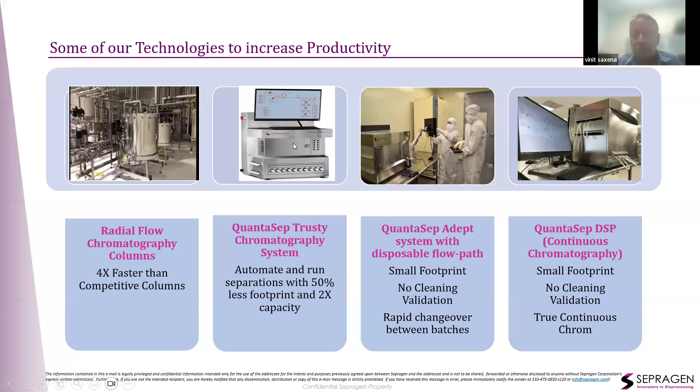Just some slides here about large scale column installations, small bench systems, single use systems, continuous systems, resins, pre-packed columns, inline dilution systems, continuous systems like that. Okay, so that's the one minute commercial, we are done.

And so now, what is the problem with the current process?

Everyone is focused on reducing cost, reducing the complexities, speeding up the process, reducing cycle times, reducing FTEs, operating costs, cost of goods, cap cost, etc.

Historically, biological manufacturing processes have been batch or fed batch. This has resulted in very complex processes which are unit operations dependent. You have a whole series of unit operations and hold steps between them, so everything's labor intensive. You have to take samples at each point in the process, creating hold steps, and it adds to the cycle times, lowers efficiency, etc.

And the facilities we have are modeled after this batch process. So if the titers go up, suddenly the purification suite isn't big enough to handle those large columns or skids, or our buffer suites don't have the capacity to make buffers, or we don't have enough storage space for those things. Lots of issues like that, where we're blocked in terms of ability to really bring efficiency to the production floor.

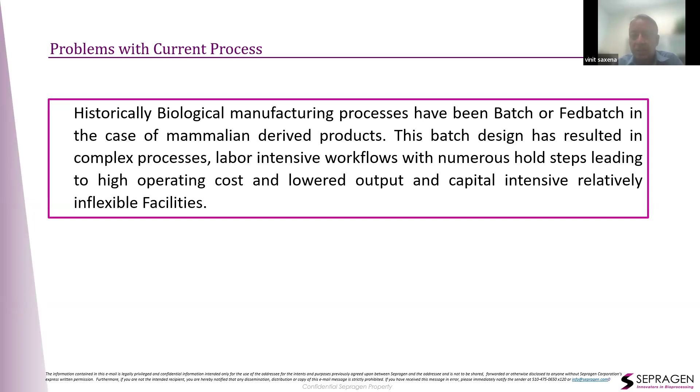One of the most compelling reasons, since we are a regulated industry, when people talk about continuous chromatography, one thing that may come to mind is, what does the FDA think about it? So we wanted to get that out of the way. For people who aren't in the know, the FDA issued guidelines as far back as 2013, where they're pushing for continuous processing and bringing about more efficiency in our ability to produce products at lower costs.

They want, of course, proper processes in place so we can monitor the process effectively, bring more PAT, process analytical technologies, to the fore, so we can ensure the processes are robust. But ultimately, the driver is to lower manufacturing costs and bring about efficiency. So this is one place where the regulators are actually aligned with this push towards continuous processing.

And people in manufacturing spaces may think that's something new and they'll have resistance. Not at all true.

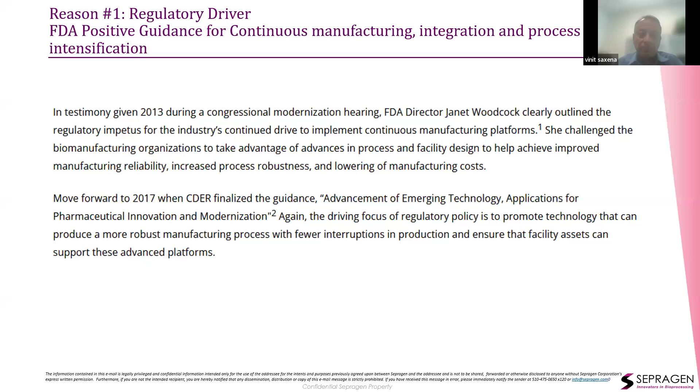The second reason for considering this is, especially if you're considering a greenfield site, there's lots of data out there to show that the CapEx of a continuous process is far less, especially if it's dedicated to a particular process, than a greenfield batch operation.

Sizes of the equipment, number of tanks required—well, you figure you're doing one part of the process at a time. So you're batching things, making the batch large, processing, then going to the next step. Even though you can have some marginal overlap, it's still a very slow process.

What we found is that if the process is running continuously, for instance, column sizes can be reduced by as much as 10x because you're doing continuously more cycles, right? You're not doing one big batch and running it on a big column. So column sizes come down, daily buffer consumption can come down.

The hold tanks and surge tanks between unit operations go away, and all that QC from those tanks kind of goes away. The number of totes required goes down significantly, so you have much more usable footprint and a better workflow.

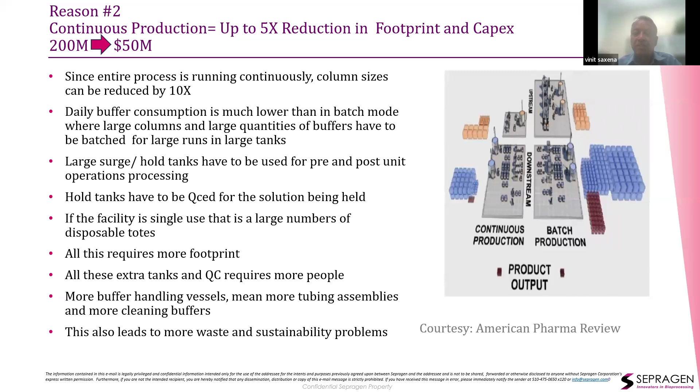And of course, it adds up in terms of less FTEs, less waste, less sustainability issues, less energy costs. So overall, it obviously positively affects not only the CapEx by making a smaller facility—facilities are expensive—but also OpEx as well.

And here's a traditional process, and these have long cycle times. As I said, you go a step from one process step to another to another. In terms of process intensification, what are we looking at?

We are doing continuous perfusion cell culture, great. And then we might be doing ATF or something, or continuous centrifugation. Then we might be moving to continuous chromatography—some of us are.

And then there's, of course, what happens if this is a standard antibody—what happens to the VI step? What happens to the flow-through steps? What happens to UFDF? What happens to formulation, fill, and finish? So we have hold points, and these things can be made continuous by concatenating and integrating these various steps, but everyone forgets about buffer management.

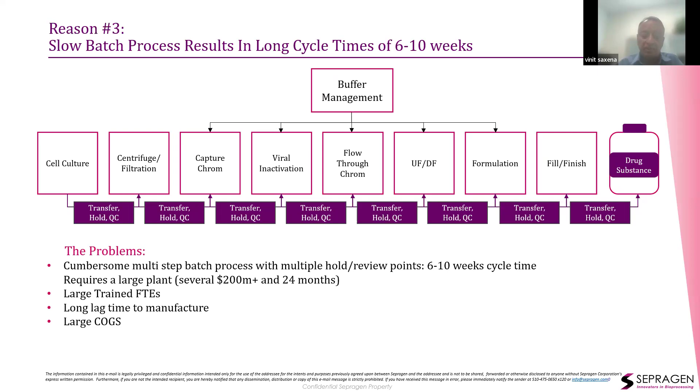There's no sense in running a continuous process if you're going to make buffers in batches and run a bucket brigade, where you're having to store lots and lots of totes. So you have long cycle times, and obviously, as a result of these complex operations, your COGS are very high—your cost of goods are very high.

The potential impact from going from a batch mode to a fed batch mode to a continuous process could be a 5x reduction in CapEx, and as much as an 8 to 10x reduction in OpEx. So really major benefits to be had, and we really need to look carefully and hard at how we can start to incorporate these in our manufacturing facilities.

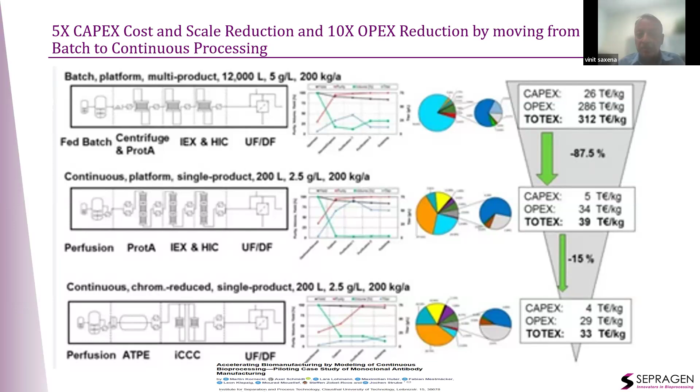And here's a simple example.

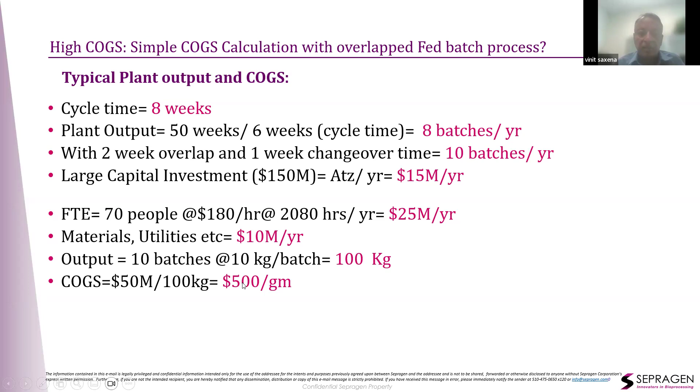Currently, even if you overlap batches and you have a $150 million investment in CapEx, and you're running 8 batches a year with an 8-week cycle time, or you overlap these things and are more efficient to run 10, maybe 12 batches, at 70% facility utilization, that's $500 a gram. Keep that in the back of your mind, we'll come back to each of these points.

So what happens now if the titer goes up? If the titer goes up, great, upstream there's no problem. But downstream, everything is stressed, because these suites are all of a sudden not enough. You have bigger columns, bigger skids. The buffer prep rooms are not big enough because you need more buffers if your column sizes are going up. And for storage, certainly not enough.

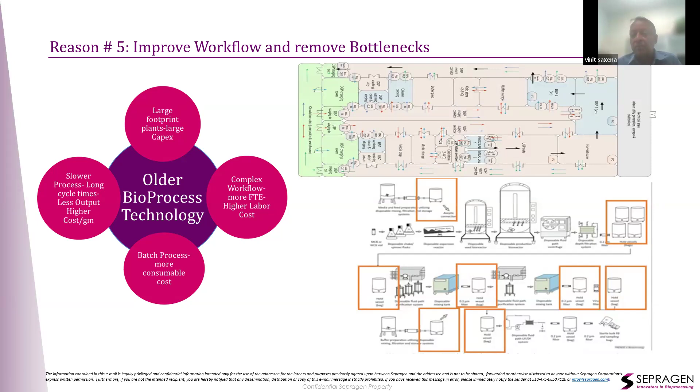How many of us have seen totes lined up in these hallways, and people having to stop their runs to pull totes in and remove the spent totes out? Very, very common. All these kinds of workflow issues and bottlenecks really slow down the process, cause us to have more FTEs, and also cause operational and quality problems.

And of course, very complex, labor intensive, and costly. So the COGS don't relate just to amortized capital costs, where you can have a smaller facility if you go continuous and therefore less amortized capital cost, but also the consumables and the labor. You add all that, and it's a significant effect on the cost of goods, and of course your workflow complexity.

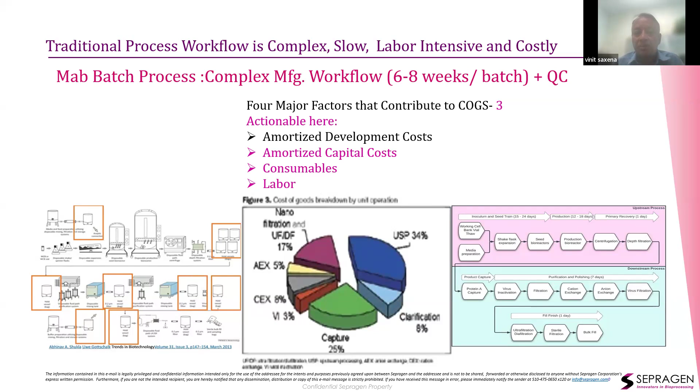So we'll just take one example out of the workflow when we talk about complexity: making buffers. BioPhorum did a study and concluded that for making 2,000 liters of buffer, it takes 7 hours with 2 FTEs. You look at how many chromatography steps there are, what the scale is, and how much buffer you actually need.

Even if you have a continuous process, in this particular plant we have a continuous process where, in light blue, you have your process gallery—it's like a big ballroom type of operation where you're going closed loop from one step to the other. This whole thing in red is your buffer prep. Especially if you're running an intensified process, your titers are high, the amount of buffers that you need are huge, and somebody has to make them.

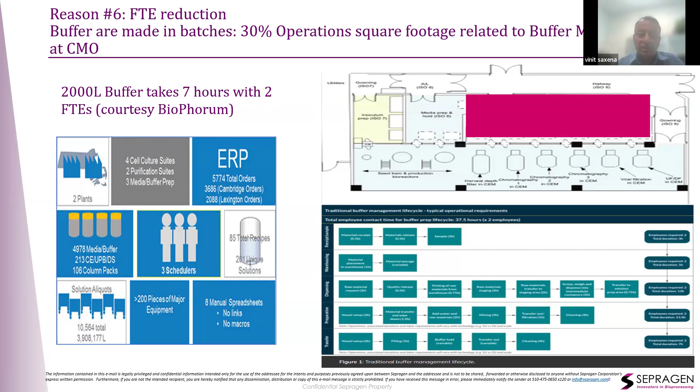So you find that your FTEs in that area go disproportionately as your titers go up—your FTEs and space requirements go up.

Some of you might be members of NIIMBL, the National Institute for Innovation in Manufacturing Biopharmaceuticals, others may not. For their members, they're given a guideline of a certain continuous plant design, and we're not privy to show that, but this is a concept very similar to that, where you can have a processing suite essentially down here for a typical antibody going from upstream to Chrom 1, Chrom 2, Chrom 3, and intermediate steps in between for a continuous process.

And then you could have your individual components of the buffers—say, monobasic phosphate, dibasic phosphate, 1 molar as an example, 3 molar salt, or it could be acetic acid, 1 molar, sodium acetate, 1 molar: the components needed to make the buffer, and the relevant salt or other additives you might need, so those basic chemicals.

And then they have a stock buffer blending solution, which can mix 1x or 5x buffers. In order to keep the space down, they propose making 5x buffers and then having chrom skids here with the ability to dilute the 5x buffers. So that's the space requirement.

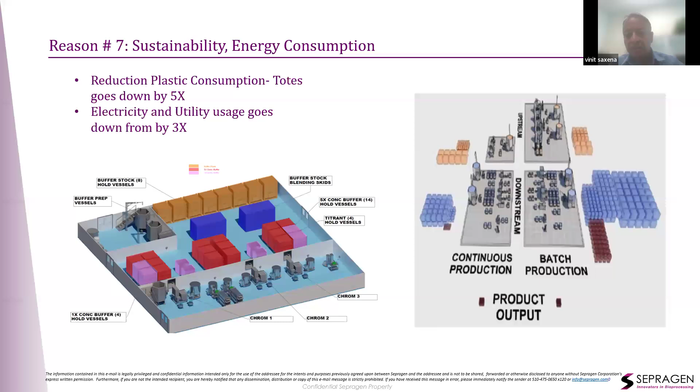So those are all the 7 reasons why we would want to consider continuous processing, whether you do it incrementally in each of your steps and move down from the beginning to the end, or you take particular sections of it, or if you're doing a greenfield, doing the whole thing and making a connected process.

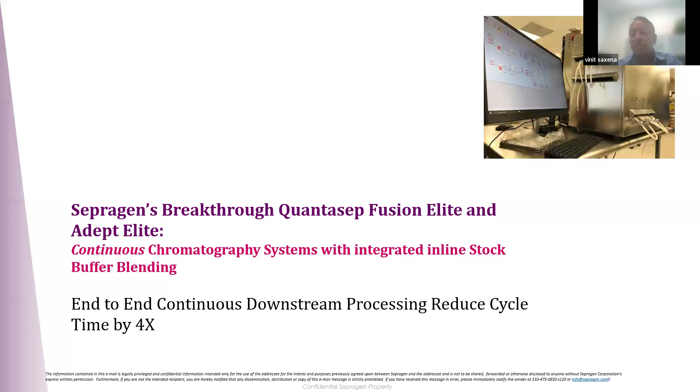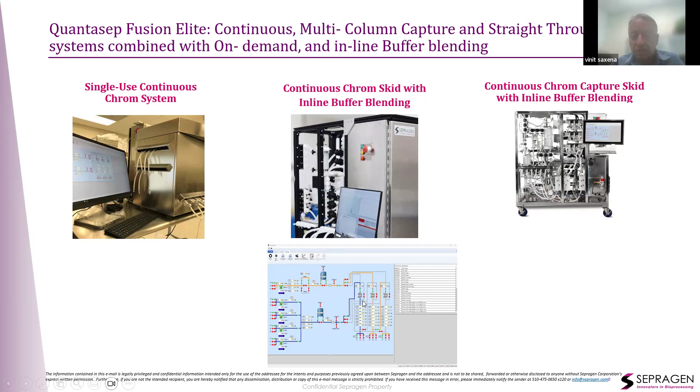And then these columns go around in a round robin, musical chairs or musical columns. So you can continuously run your harvest while you're also doing elution of one column, column 1, column 2, column 3, like that. And we can do it with inline buffer dilution, or without inline buffer conditioning, whatever people want.

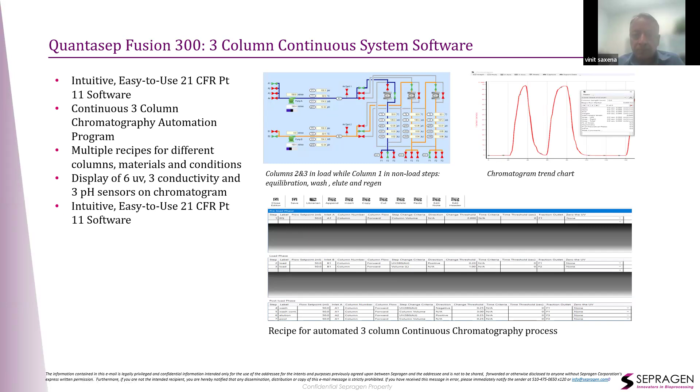And here's another example of the bench scale system where that is being done. In fact, we have automated an entire antibody downstream process. So coming from clarified harvest, we have what we call a capture skid, where we have, in this case, a 2-column system running protein A columns, running the harvest continuously, washing and eluting from the stock chemicals, while buffers are being made for these in line on demand.

And then going through the VI step where there's a low pH hold, and then a second skid, which is a flow-through skid, essentially a straight-through process, where the pH is adjusted in line by the skid itself, goes through an AEX column. The salinity is adjusted in line, just continuously - there's no hold tank or anything. And then it goes through the HIC column, through a nanofilter, and out. So between these two skids, which we call a fusion elite and a fusion continuous capture and continuous flow through, the entire process is done.

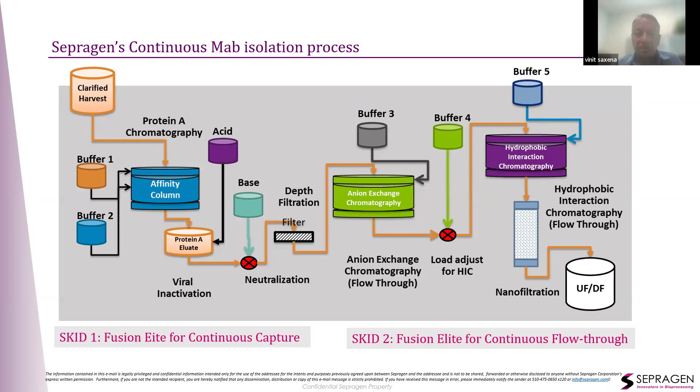Okay, so here are pictures of that.

And the P&IDs of such a system, where you have the load here going to either column 1 or column 2, and then this is the buffer making part of the skid, where you have the water pump, the acid pump, the base pump, and the salt pump, all running at different ratios. You don't have to set the ratios - you just set the molarity, the pH, and conductivity in the program, and the buffers are made automatically.

And they automatically switch from - as you load, your first column gets saturated, moves to the second column, while the first column goes through the wash, elution, regen, and equilibration cycle, and then they keep flipping.

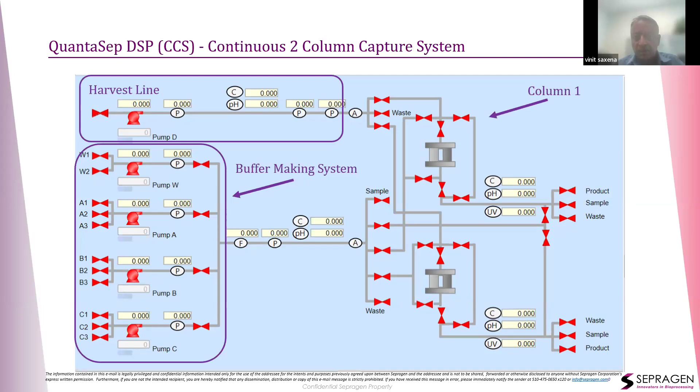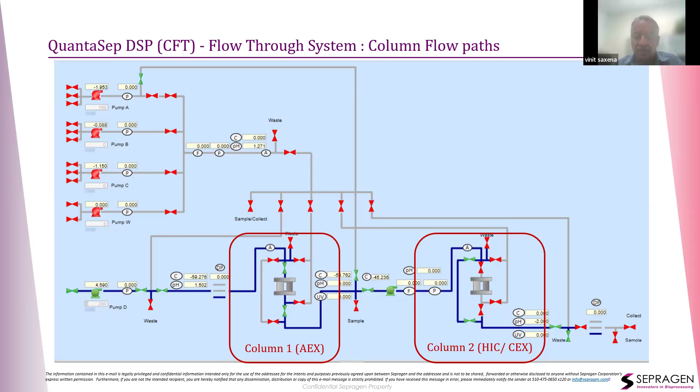So that's the buffer maker, right? That's the harvest, see the column 1, column 2. And then similarly, we have the flow-through system where you have the AEX column there, the HIC column. Some cases we have a CEX column.

And so we've done multiple lines of this. This is a company for which we've done all three - the capture, the AEX, the CEX - and this is on a high titer 2,000 liter perfusion line on the left here. So there are 2 parallel lines that they have for this facility, running capture for an antibody processing line - capture, AEX, and CEX.

By the way, we can do in the CEX, they're doing gradients. So it's not like you don't have the ability to do gradients and do buffer mixing, all that, inline buffer blending, all at the same time.

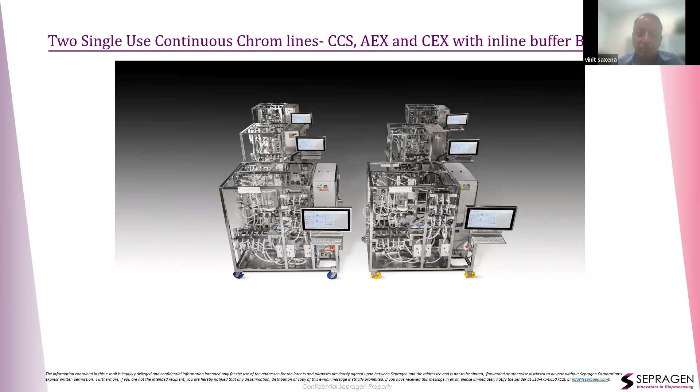So essentially, what this enables one to do is do 2 functions in one, right? So whereas you might have heard of continuous processing systems, a lot of the reason why these have not been adopted is because they have to make buffers in batches. And while there are separate machines to do that, they still have to make those buffers, put them in totes, transport them somewhere, move out the empty buffers, move in the fresh buffers, or if there's level sensors in the tanks, then those can automatically turn on the buffer making system. And you have to wait for it to equalize, and then stop the process until those are filled, etc. So there's a lot of complications around that.

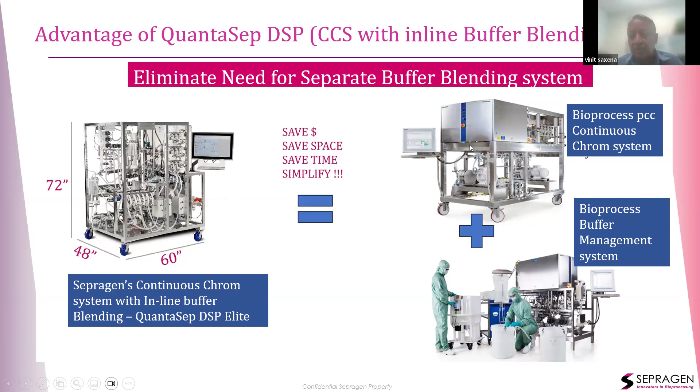We've got all that in one neat package here, where in this system you can do continuous chrom with inline stock buffer blending, and that is the equivalent of these two machines. So now you have, really, it frees you up. You're looking at removing the blocks, so it frees you up to adopt continuous processing and manufacturing without a lot of hassle.

And so here is the P&ID for actually the operating software interface for that machine, where you have the harvest pump here on the top, goes through a pre-column, a switching pre-column filter, bubble trap, goes through column one, through all the bank of sensors, UV conductivity, pH, goes and is running an overload, goes on to the second column, while the first column, which is saturated, is then goes into the mode where it's doing washing and equilibration.

And regeneration, things like that, from the same set of concentrates. So it's the same, let's say, an acetate concentrate that you have hooked up, or connected, which is 1 molar sodium acetate, 1 molar acetic acid. But you just tell the machine, okay, I want 0.05 molar acetate, and I want 20 millisiemens, whatever it is, 0.1 molar salt. And the system's pumps will run at the right ratio to give you that molarity, that pH, and that conductivity.

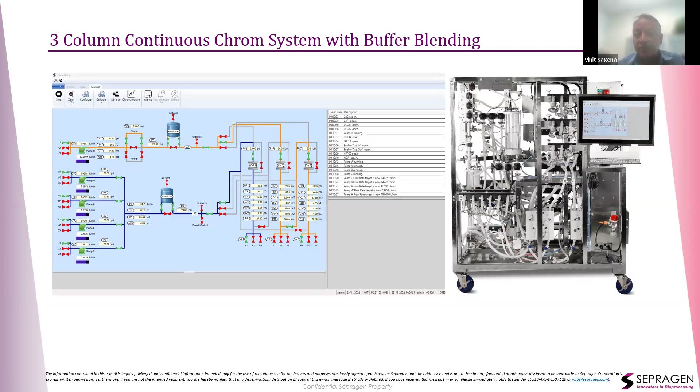And when the buffer is outside that range, you have a process tolerance alarm where that gets ejected, and then it comes back online when it's within the range and goes into the column. Very convenient, very transparent to the user, and you can continuously run your process. You have the usual event logs. You can make recipes. You have a chromatogram where you can look at all the trends.

Once you finish your manual run, you just stop it like this, and it will save all the event logs that you can see here, all the alarm logs, and all the chromatogram will be saved.

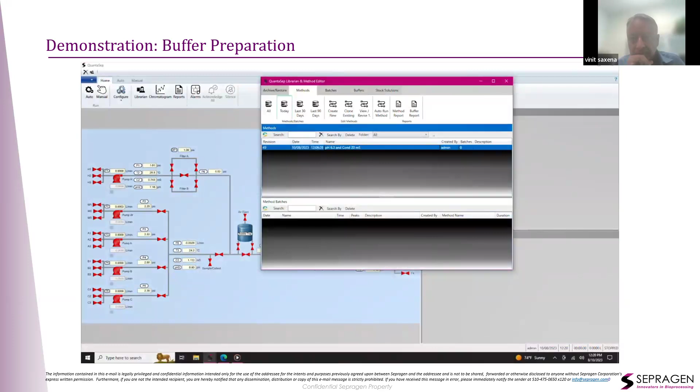I wouldn't go through it today, but I will show you one of the methods that I will be running today, which has two unique features, a conductivity set point and pH set point. This is actually what is unique about this system. Whatever you have in the solution concentration, whatever you have in your pH, whatever you have in your conductivity, the system has the capability of doing this kind of blending to reach your conductivity set point and pH set point without any interaction from you. You just give the order to the system and the system will do it for you.

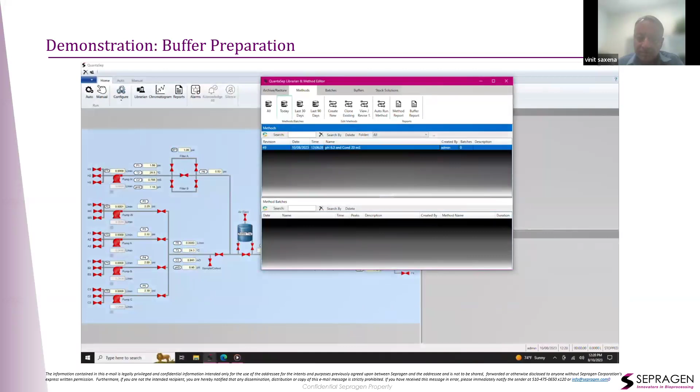So for this method I created, we will have a conductivity of 20 millisiemens out of a concentrated solution of 3 molar sodium chloride, which is approximately 200 millisiemens, and we will have a buffer blending between sodium phosphate mono-basic and dibasic at a concentration of 0.5 molar each, and we would like to have a blending giving us a 6.3 pH.

So the methods that I created, we can review it together very quick. As you can see here, it's like an Excel-based thing. So here you can type a label for your step.

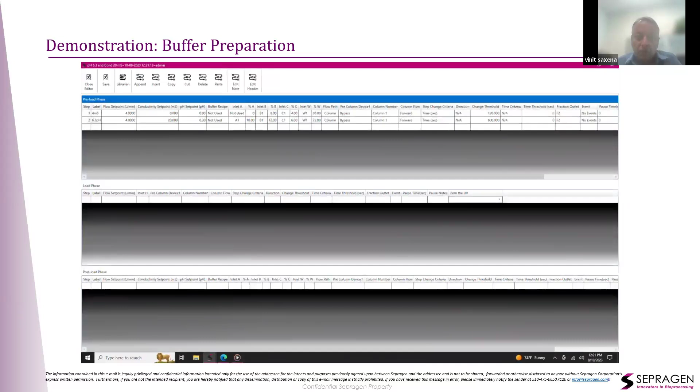You can choose a flow set point, whatever the liters you would like to have, a conductivity set point, pH set point, and which inlet you're gonna use. We have a dedicated pump for each of those. We have a dedicated pump for the conductivity, called pump A. The system already knows anything coming from pump A will be for a salt, pump B is dedicated for an acid, and pump C is dedicated for a base. Whatever the system would like to blend for you to reach the set point, it's a random percentage.

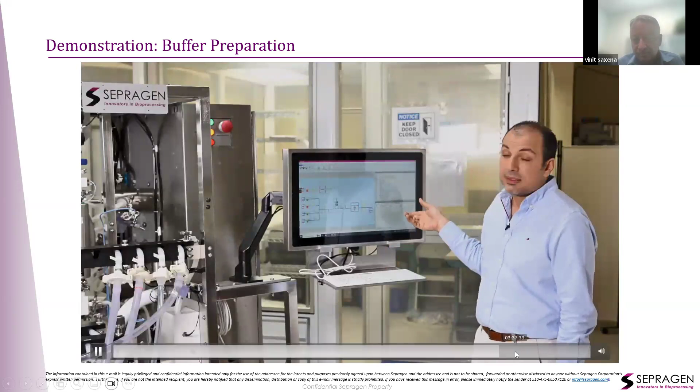Obviously, in deference to all of you, we want to keep to our time here that I promised you, but you get a sense. That was one of our scientists, Ibrahim, who's one of our application scientists, talking about the machine and its ability to be very easily programmed.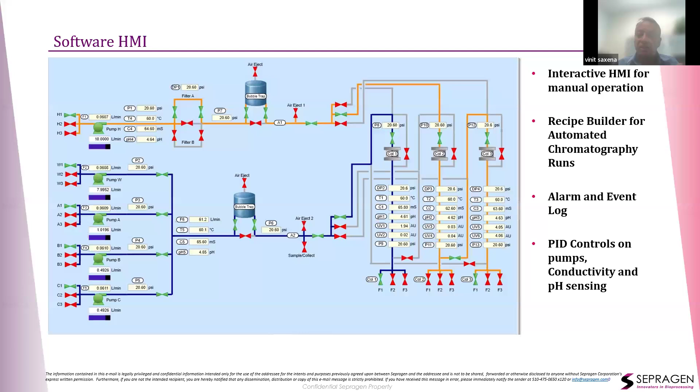So you can run continuously and have the buffers be made continuously. You don't have to set ratios of different pumps or flow rates or anything like that. It all does all of that behind the scenes, right?

And then the result from something like this, for instance, is a 200 millimolar salt that we said was 10 millisiemens, achieved in just like 20 seconds. And here, 45 millisiemens is the next wash step. Anything that's outside that operating envelope, obviously like this part of the peak goes to waste.

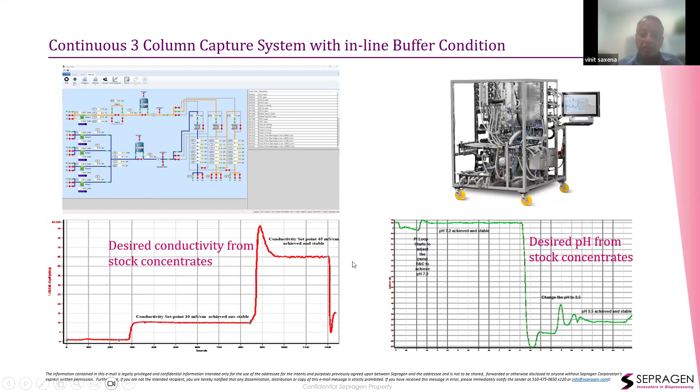While these equilibration and wash buffers are changing, the pH might be changing as well. So pH here, for instance, is going from 7.2 to 3.5. Again, those transitions happen in approximately a minute. So that's about the level, given the whole volume in the system, if you were switching from one buffer to another, that's what would essentially be going to waste, which is what happens in this particular case. And when you hit the stable point, then the buffer goes right to the column.

So in doing this, we looked at the footprint from earlier, and that was this particular process, what we were calling a Gen 1 process. The standard batch process is Gen 0, and this is a Gen 1 continuous process. With what I just showed you with those machines, you can eliminate even these buffer-making machines and all these hold tanks over here having 5x concentrates, because you can just put your stock chemicals over here, move them right to the front against these skids, and go ahead and do your continuous chromatography with those stock chemical solutions.

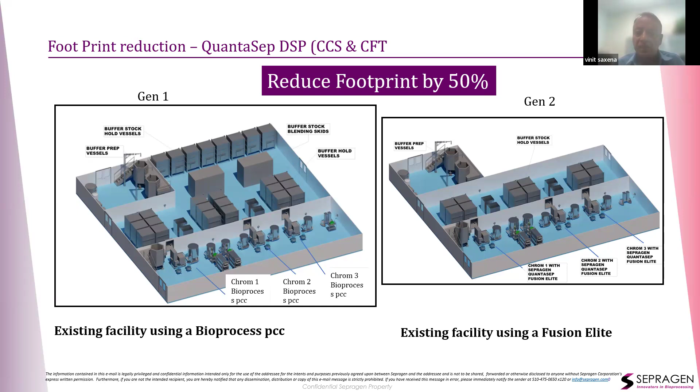And so it reduces the FTEs, reduces the footprint even further, and reduces the cost. Going from a Gen 1 continuous plant to what we are doing and calling Gen 2, in this particular model for this plant, we've reduced the capex from 13 to about 13.6 million to 7.5 million. So that's over a $6 million, almost a 50% reduction in capex.

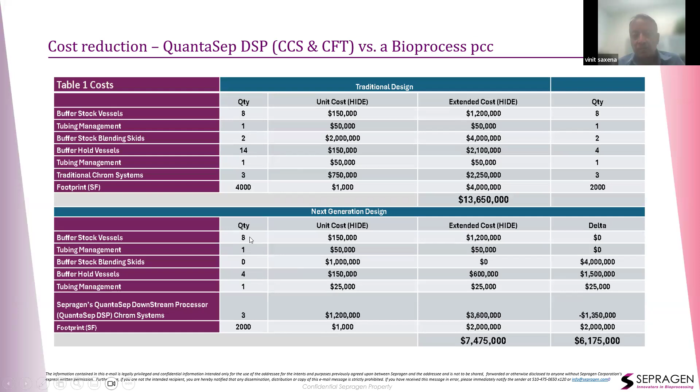Not to talk about the number of stock buffer solutions or hold tanks that you would need. For instance, here, this is for a continuous process, by the way. You have 14 hold vessels, right? We are down to 4. So look at the impact that we have on sustainability, right? Significant. We have almost 30% lower.

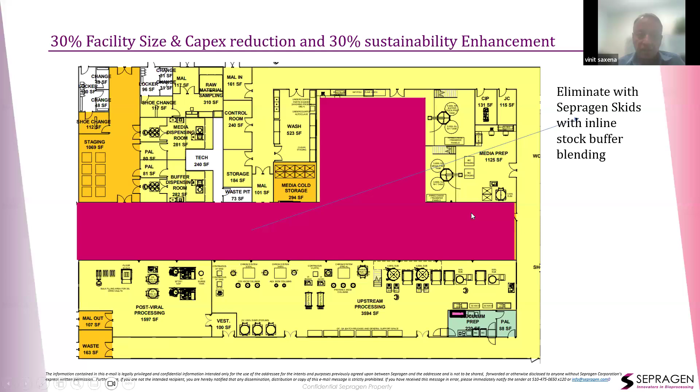And we don't need all that space again. So facility size is reduced, capex is reduced, and there's sustainability enhancement. And of course, we've simplified the process, right?

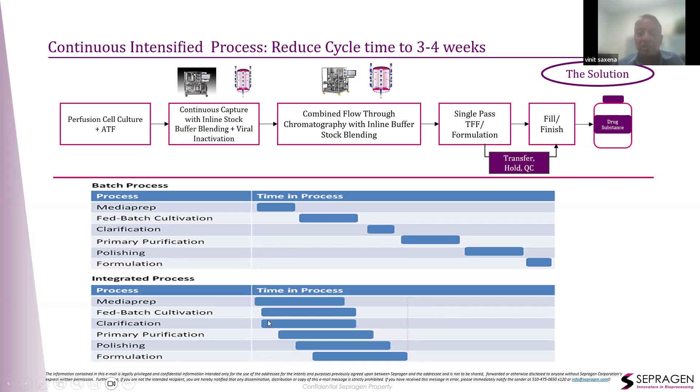As we've continued, if we can do in the same skid, we can do continuous capture and VI, and the next skid we can do flow through and inline buffer blending. The whole buffer blending part goes away, and this process becomes more simplified and more amenable to continuous processing. And then you can see that from a batch process to continuous integrated process, the whole cycle time is reduced to 3 to 4 weeks.

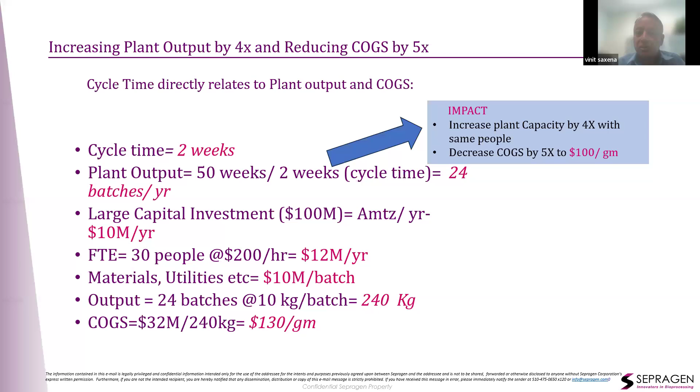And the impact of that is if your cycle time for the same plant is reduced, instead of making 8 or 10 batches, with a cycle time of 2 weeks, you can make 24 batches for the same output. Fixed expenses of people as well as facilities, your costs can come down dramatically. In our model, it comes down from $500 to $130 a gram. So you're looking at a 4x improvement in plant output because you're making more batches in that semi-continuous operation, more batches a year, and you're amortizing your costs over more batches, and the cost per gram also comes down.

So to summarize, there are 7 economic, operational, and sustainability reasons to go with continuous chromatography, preferably integrated with inline buffer blending like we've shown you. Those are: increased output, as we just showed, because you can do more batches per year since your cycle times have come down. CapEx reduction, because your facilities are smaller. Reduced facility footprint, reduced COGS, reduced cycle times. And if your process is more simplified, without so many hold steps and buffer-making requirements, you're reducing workflow bottlenecks. And of course, you're improving sustainability, with reduction of chemicals, smaller footprint, smaller equipment, and fewer disposables.

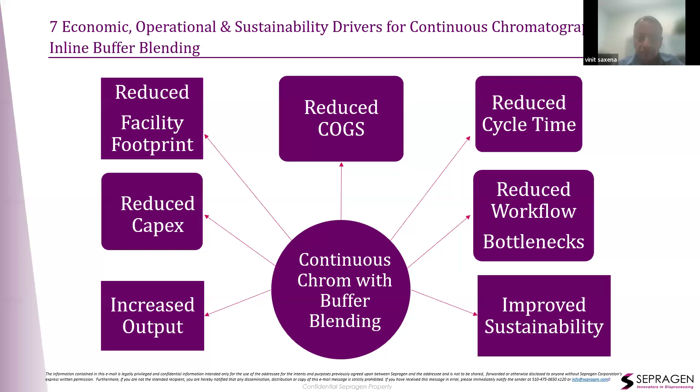But just about us - if this is a direction you are choosing to go in or considering, look us up. We do a lot of customization downstream. We recognize that one solution doesn't fit all, one size doesn't fit all. People's plants are different, their control strategies different, and whether it's a greenfield or retrofit, we have to conform to whatever your plant's requirements are. We have project management people here, world-class engineering, and so we can design something that's a better fit for you, as opposed to picking something standard and off the shelf which may or may not work for you.

And we go through the whole project plan from preliminary design, P&IDs, solid modeling, the whole DQ process, FDS, drawing reviews, implementation, FAT, SAT, and eventually IOQs. If you have a DCS system, being able to talk to upstream and downstream equipment is important, whether through Profinet or other means if you have a continuous system. You may need to talk with the DCS system through OPC UA. So we provide those facilities, and our software team can work with your team to ensure that. Similarly, if you're on a network that authenticates access with certain privileges, we support that as well.

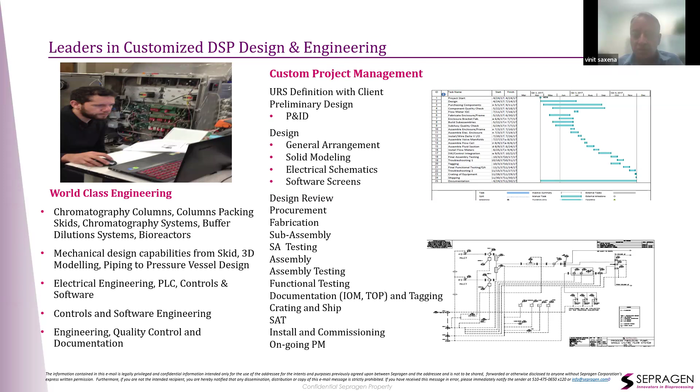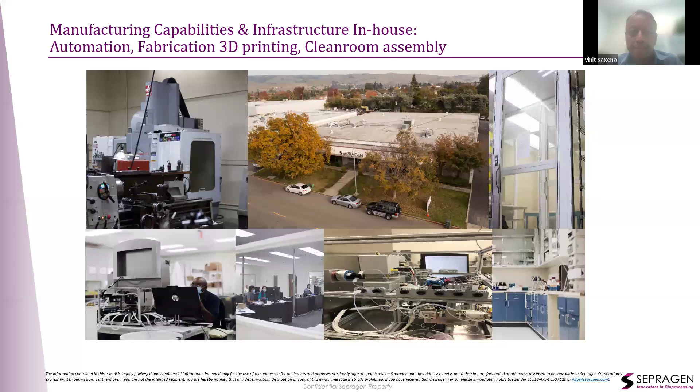And so we do a lot of our own custom manufacturing for these things. A lot of parts are not available - we've invented them, we make them here. We're looking at single use, we have our own clean rooms, we have our design team here, and manufacturing capabilities, custom manufacturing capabilities, 3D printing, like that. And at the end of the day, we work with you and we deliver what we promise.